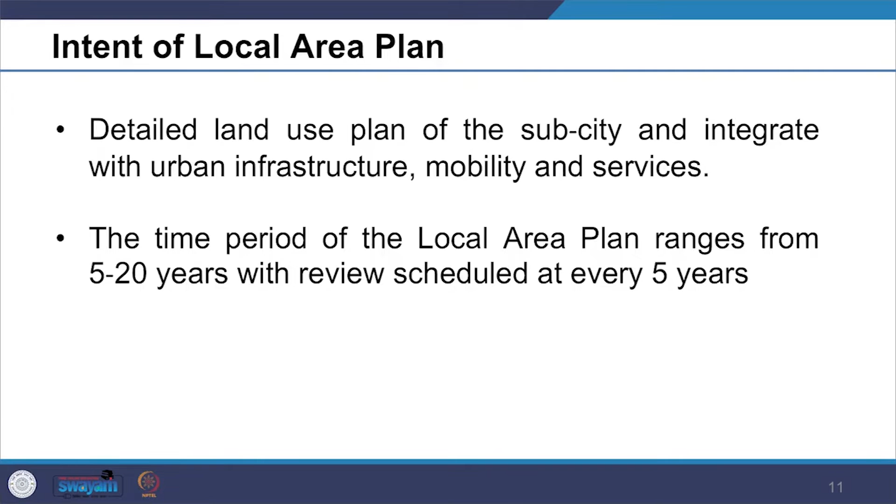Looking at the intent, in the local area plan, we provide the detailed land use plan of the sub-city and integrate it with the urban infrastructure, mobility and services. The time period for the local area plan ranges from 5 to 20 years with a review schedule at every 5 years.

Examples of local area plan include zonal plan or sub-city plan, town planning schemes, ward committee plan, coastal zone management plan, urban development plan, and urban redevelopment plan.

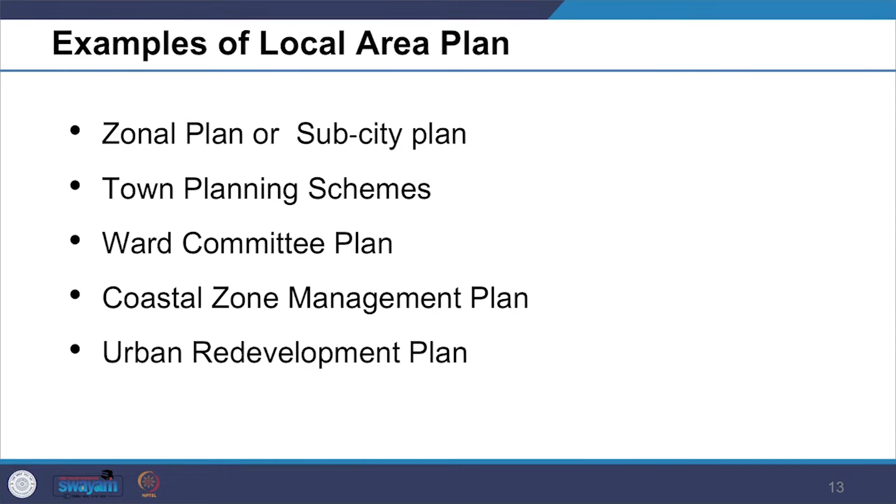Once the development plan is prepared, its proposals can be further implemented by preparing local area plan. Local area plan is significant in view of the 73rd and 74th Constitutional Amendment Act, as a local area plan, in its true sense, allows disaggregation of the planning decision and implementation process. Local area plan improves the implementation of the development plan, and most importantly, brings the planning process closer to the local people. It allows the realization of the development in our neighborhoods.

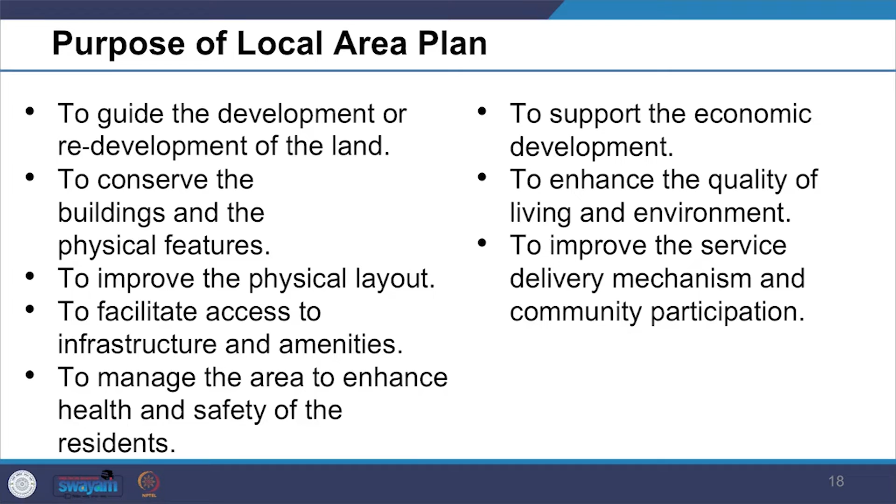Local area plans are primarily prepared to guide the development or redevelopment of the land, to conserve the buildings and the physical features, to improve the physical layout, to facilitate access to infrastructure and amenities, to manage the area to enhance health and safety of the residents, to support the economic development, and to enhance the quality of living and the environment. Local area plan is used for improving the service delivery mechanism and community participation.

While preparing the local area plan, it is also important that implementation details are specified and are aligned with government policies, such as the state land use policy, state perspective plan and/or state urbanization policy, state urban housing or affordable policy, township and integrated township policy, rainwater harvesting policy, energy policy, disaster management policy, industrial and service sector investment policy, policy for barrier-free environment for elderly and the physically disabled, e-governance and information technology policy, tourism policy and similar other policies.

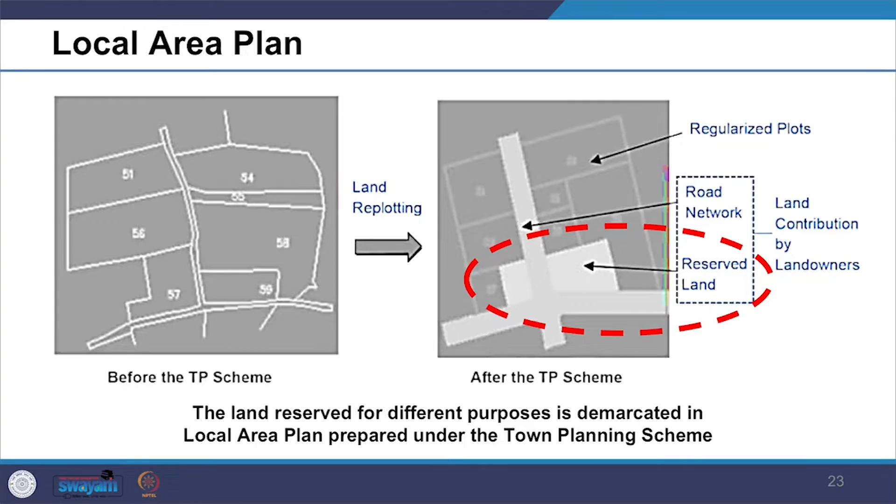In the local area plan, specific projects within the planning area should be prepared. The land reserved for different purposes such as roads, for public purpose, for construction or for reclamation should be delineated. The local area plan provides a framework for recovery of the associated cost for the proposed public projects.

The mechanism adopted could be levy of betterment charges, charges on additional development rights, or user charges.

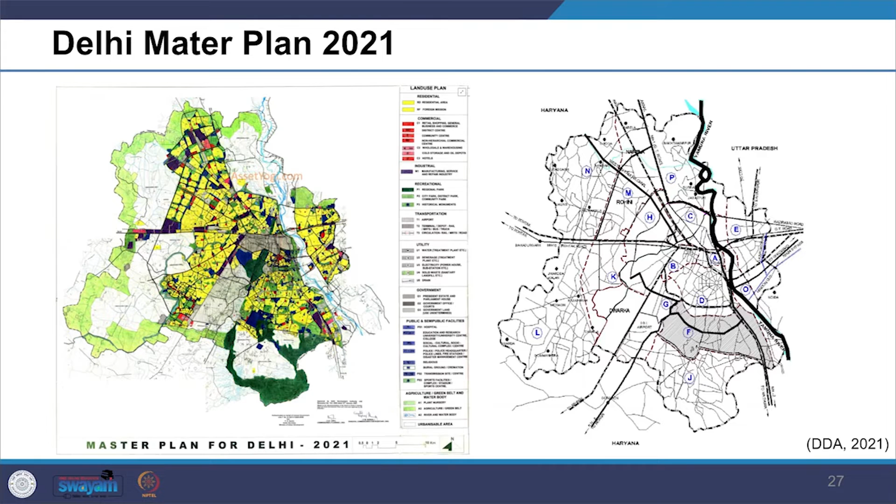Now, let us look at the example of Delhi. We are looking at the Master Plan of Delhi 2021, where planners had prepared the master plan for the entire city. In order to prepare the detailed sub-city land use plan, the Delhi planning area is further subdivided into 15 planning zones, or divisions, designated alphabets A to P zones, excluding I, as per Master Plan of 2021, as we can see in the image.

These zonal plans integrate the area with the urban infrastructure, mobility and services. These zonal plans help in implementing the development plan of Delhi through guiding the detailed development in these zones.

A zonal development plan means a plan for each zone or division, containing information regarding provision of social infrastructure, parks and open spaces, and circulation system. The zonal development plan indicates the actual as well as proposed use zones designated in the 9 land use categories stated in the master plan, according to which the area in the zone is to be finally developed.

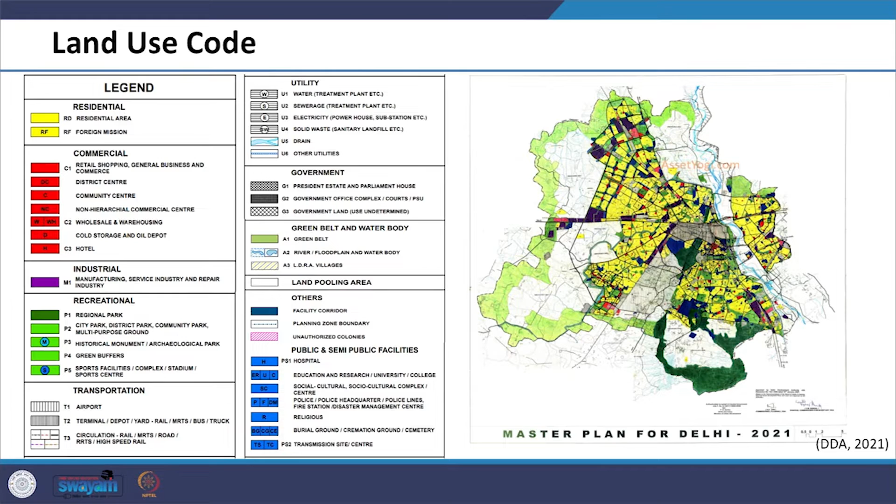We will look in detail at the zonal plan F of Delhi to understand the intent and content of a zonal plan document. Zonal plan F covers South Delhi 1 area.

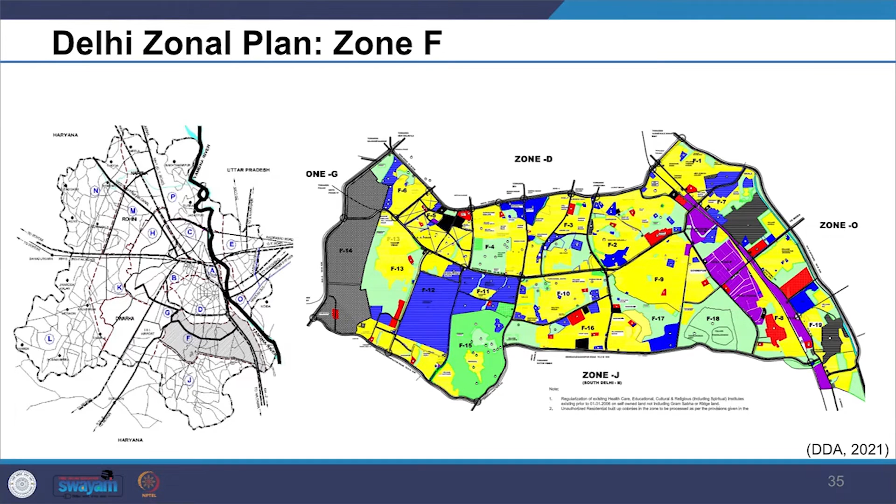The hierarchy of urban development indicated in the zonal development plan is in conformity with the Master Plan 2021. Zone F, covering an area of nearly 11,958 hectares, is situated towards the south of Ring Road from Dhaula Kuan to Maharani Bagh. In the east, it is bounded by River Yamuna and National Highway 2 bypass. In the west, it is bounded by Delhi Cantonment Area, Indira Gandhi International Airport, and National Highway 8. In the south, it is bounded by Badarpur, Mehrauli, Mahipalpur Road.

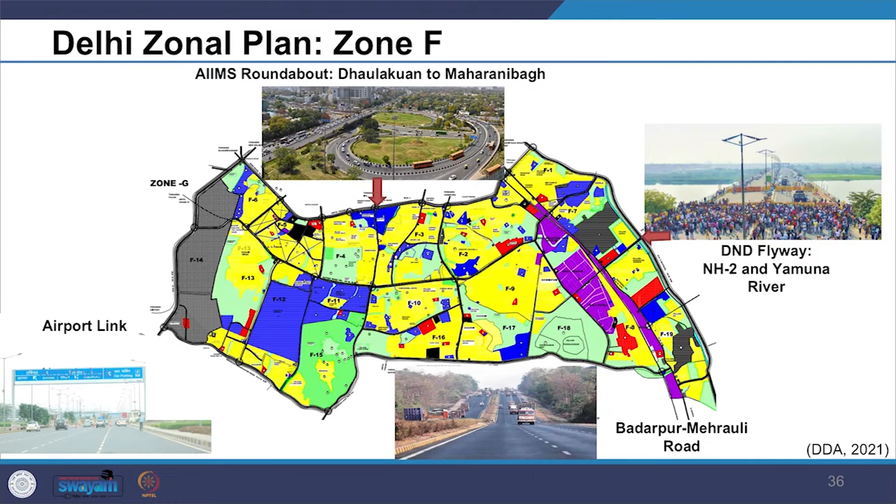As per the URDPFI guidelines, the zonal plan should contain the following. Now we are looking at the content of the zonal plan.

The zonal plan should contain an introduction section which should provide a brief about the city, indicating its regional setting, functional character, and growth trends. Further, the introduction section should also refer and connect to the development plan or the master plan of the city, for which it acts as a building block.

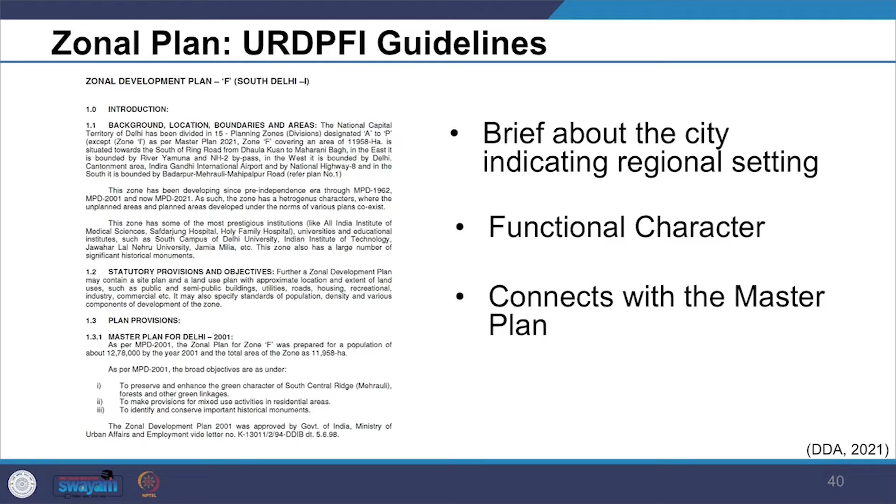We call it a building block because the local area plan plays an important role in the realization of the development plan or master plan of any city. In the plan, we also inform about the built up area, character, extent, and the delineation boundaries, so as to understand the area and plan for interventions.

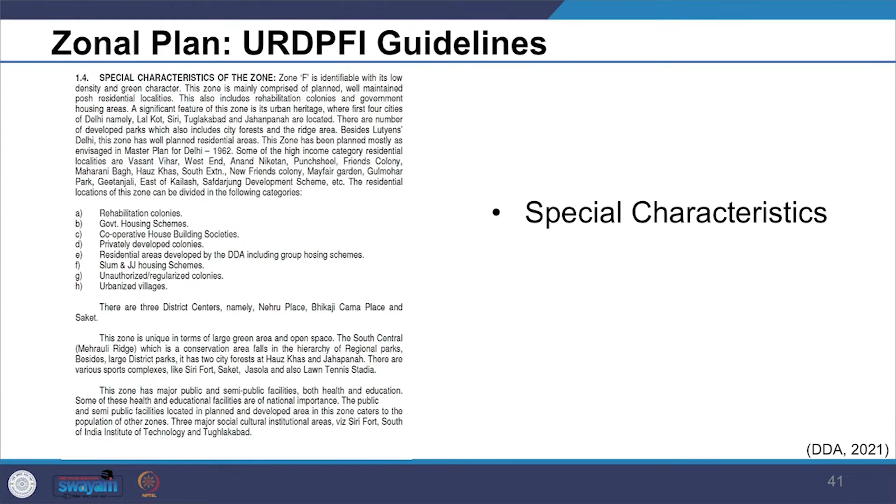In this introductory section, the interdependence of the planned zone with the other zones should be specified, so that in the plan we understand the vital role of the zone in facilitating development of the area under consideration, as well as its key role in contributing to the smooth functioning of the entire city, particularly mobility and services.

If we look into the zone, this zone has been developing since the pre-independence era through Master Plans of 1962, 2001, and 2021. As such, the zone has heterogeneous character, where unplanned areas and planned areas developed under the norms of various plans coexist.

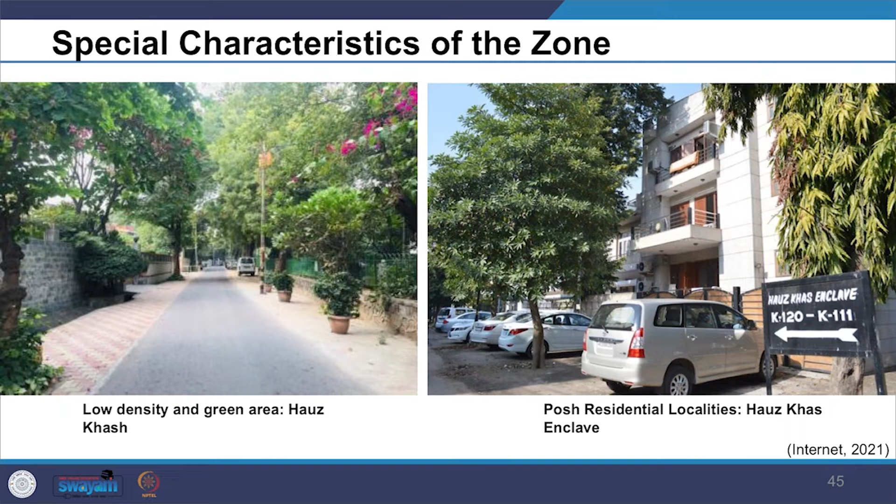Zone F is identifiable with low density and green character. This zone is mainly comprised of planned, well-maintained posh residential localities. This also includes rehabilitation colonies and government housing areas.

This zone has some of the most prestigious institutions like All India Institute of Medical Science, Safdarjung Hospital, Holy Family Hospital, universities and educational institutions such as South Campus of Delhi University, Indian Institute of Technology, Jawaharlal Nehru University, and Jamia Millia University. A significant feature of this zone is its urban heritage, where the first four cities of Delhi, namely Lal Kot,

Siri, Tughlaqabad, and Jahanpanah, are located.

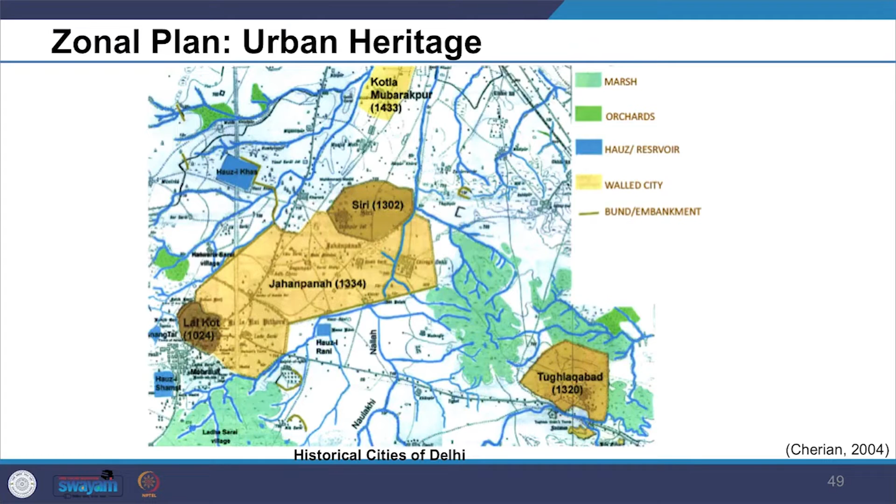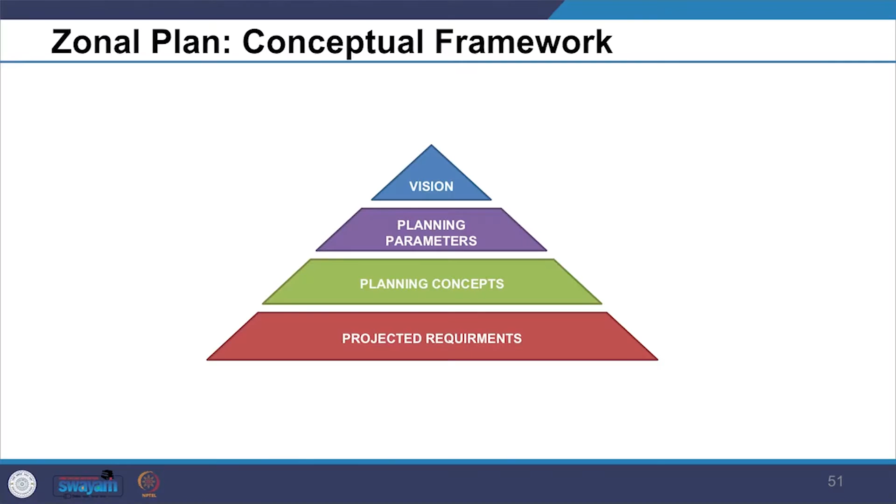The next content suggested in the guidelines includes the site background and analysis, followed by the conceptual framework covering future vision, planning parameters, planning concepts, urban design framework, projected requirements, and hierarchy targeted in the zone.

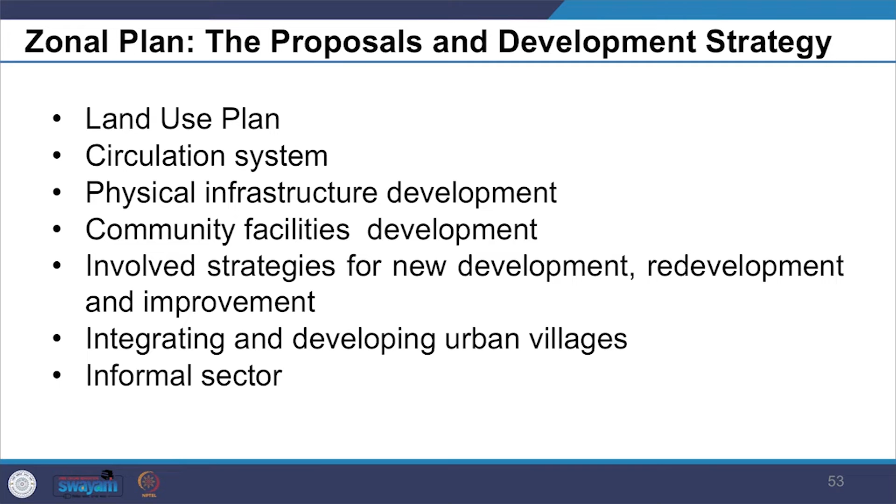Thereafter, in the zonal plan, the proposal and the development strategy should be provided in detail, including the land use plan, proposed circulation system, proposals for physical infrastructure development, and proposals for community facilities development, involving strategies for new development, redevelopment, and improvement. All these plans have to be given.

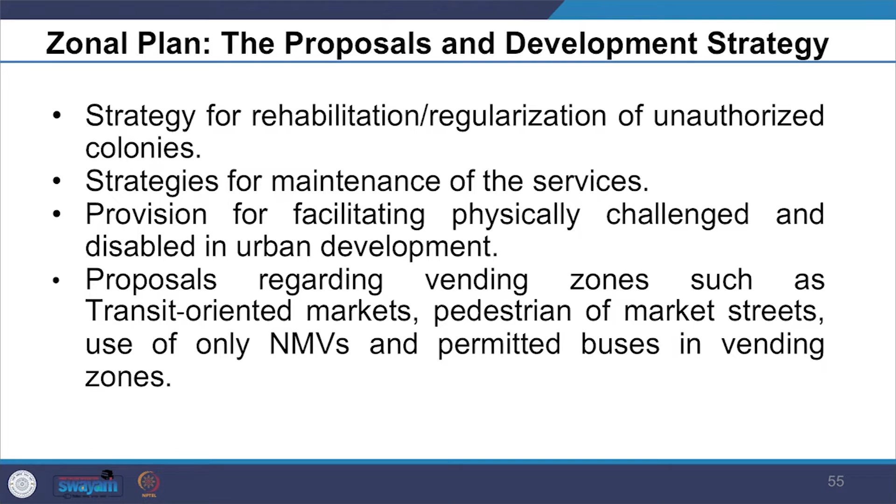Proposal for integrating and developing urban villages has to be provided, as well as proposal for informal sector development. The details should also cover the strategy for rehabilitation, regularization of unauthorized colonies, strategies for maintenance of these services, and provision for facilitating physically challenged and disabled persons in urban development.

Proposals regarding vending zones such as transit-oriented markets, pedestrianization of market streets, use of only non-motorized vehicles, and permitted buses in vending zones. Such kind of interventions can also be taken up in the zonal plan.

Further, in order to address the concerns of the environment, the guidelines suggest the following should be covered: plan for conservation and improvement of land profile, rivers, streams, watersheds, green covers and landscape should be prepared as per the requirements of the zone. Identification of heritage areas and zones, and plan for conservation, should be provided. Energy efficient and environmentally sustainable development has to be taken care of.

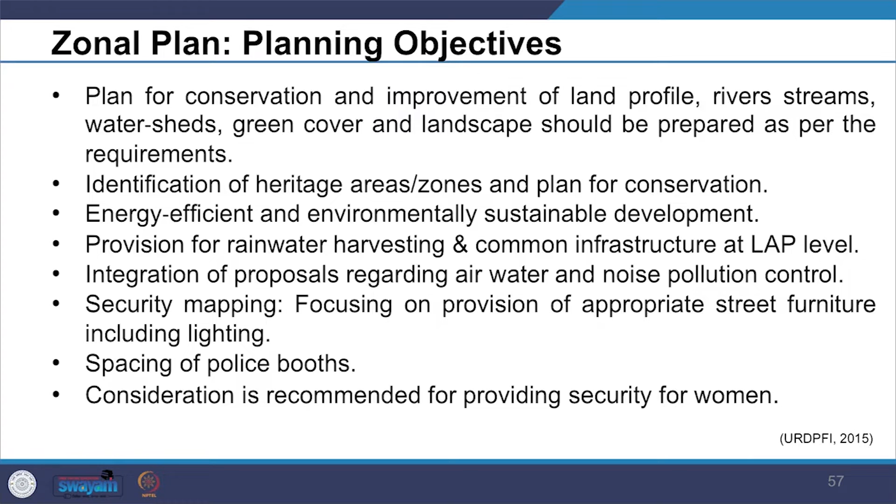Provision for water harvesting and common infrastructure at local area plan level has to be considered. Integration of proposals regarding air, water and noise pollution control has to be done. Security mapping focusing on provision of appropriate street furniture including lighting needs to be undertaken. Spacing of police booths has to be done. Consideration is recommended by the guidelines for providing security for women. All these things have to be taken care of as environmental concerns while working on the zonal plan.

Furthermore, zoning regulations have to be seen, such as defining various zones, what use restrictions would be there, uses permitted, conditionally permitted and uses which are prohibited has to be spelled out. What has been proposed for mixed use land uses has to be indicated. Strategy for non-conforming land use have to be mentioned. Strategies for hazard zones and regulations have to be clarified.

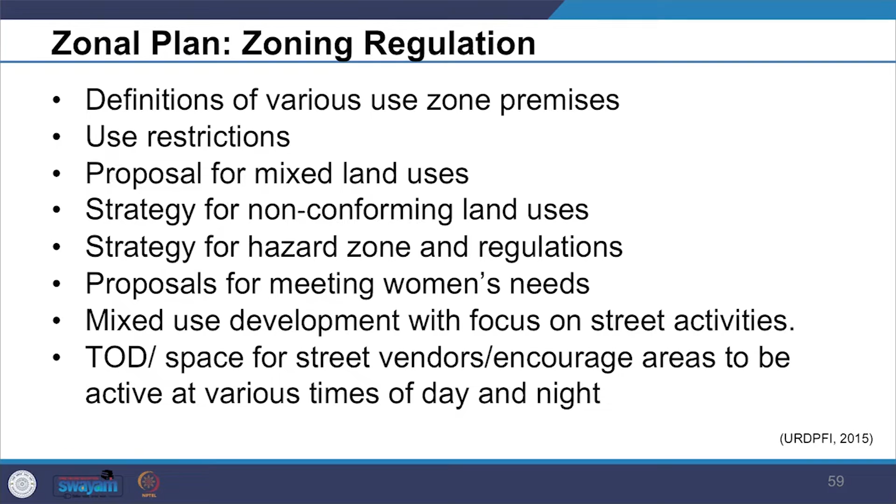Proposal for meeting women's needs, with mixed use development focusing on street activities, is also recommended specifically for women's needs. Transit oriented development and space provision for street vendors have to be encouraged in areas to be active at various times of the day and night.

We further see that the zonal plan also needs to address development regulations. Building regulations and building bylaws have to be indicated. Urban design of major hubs, if required, has to be indicated in the plan. Architectural control likewise has to be indicated. Specific development controls of heritage areas and other specific traditional areas, as defined by local authorities, if any, may be provided in the local plan.

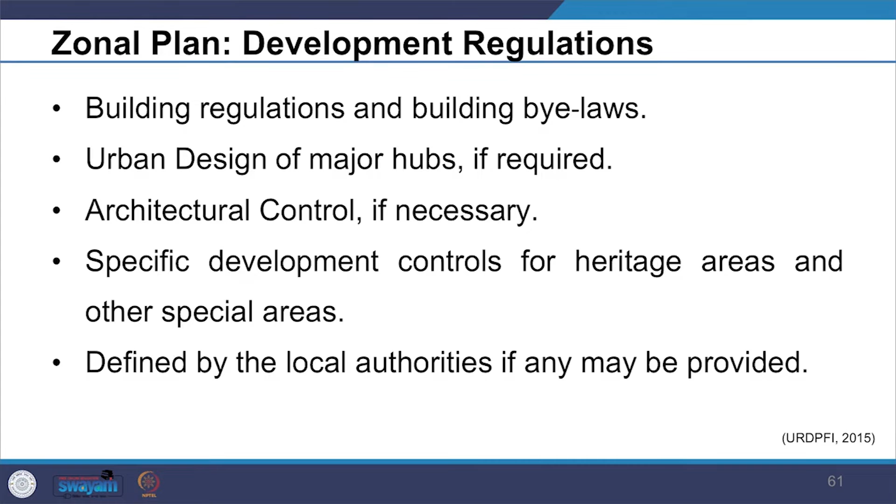Further, in the zonal plan, resource mobilization and implementation plan has to be given. While giving this, institutional setup for implementation needs to be addressed. Physical infrastructure development cost, including annual and 5-year phasing, has to be specified. Resource mobilization for implementation through public, private and other sectors has to be indicated.

Further, it needs to give an implementation framework, where one gives how the plan will be phased, what all projects and policies will be prioritized for development, and how the entire development would be managed.

Further, the local area plan provides all these maps, a suggestive list that needs to provide detailed scale maps of the prevailing situations, detailed scale maps of the existing land use, detailed scale maps of proposed land use, and scaled maps of proposed locations of infrastructure and social services, which is to be addressed in the zonal plan.

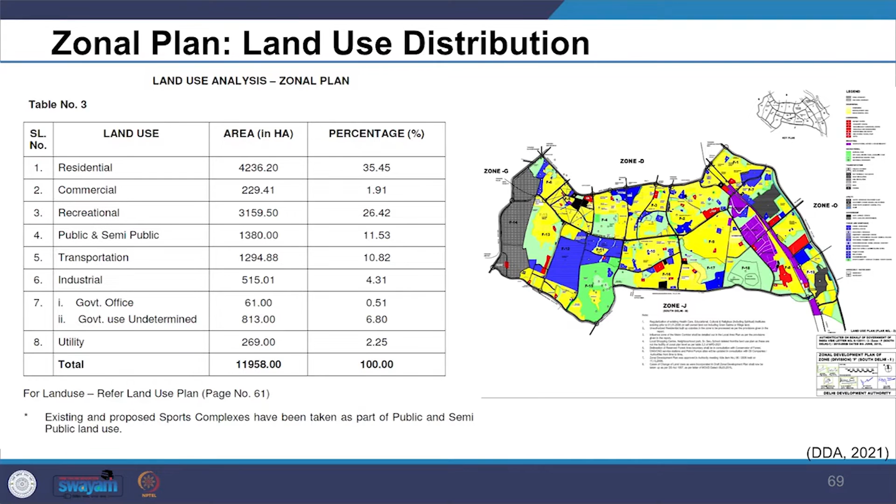Looking at zone plan F, in the background of the zonal plan, land use distribution and analysis is included, so that we know how land is put into use, its proportion, and the level of quality of life for people living in the zone. Here we see how the land is distributed, and we look at the plan prepared for that particular zone, zone F. This land use plan of zone F is made in 1:20,000 scale.

Further, while providing the population and density projection, we see the plan provides information about the existing population, the holding capacity, and the projected population. Master Plan of Delhi 2021 has stipulated the population holding capacity of this zone to be about 19,75,000, and the total area of the zone to be 11,958 hectares.

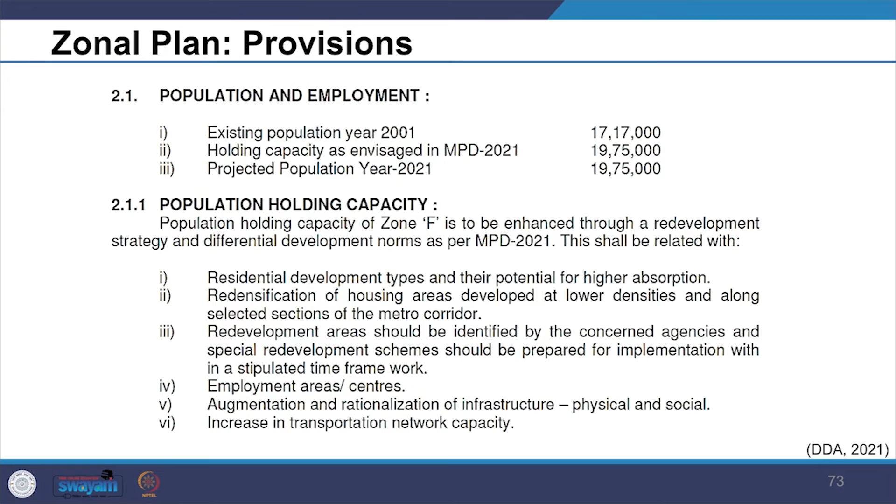As per Master Plan 2021, a number of planning measures such as local area planning, redevelopment of villages, unauthorized colonies and built-up areas, restructuring and upgradation of residential areas in the influence zone of the MRTS and major transport corridors, and a network of recreational and sports facilities to be suitably incorporated while preparing the detailed scheme, has been instructed.

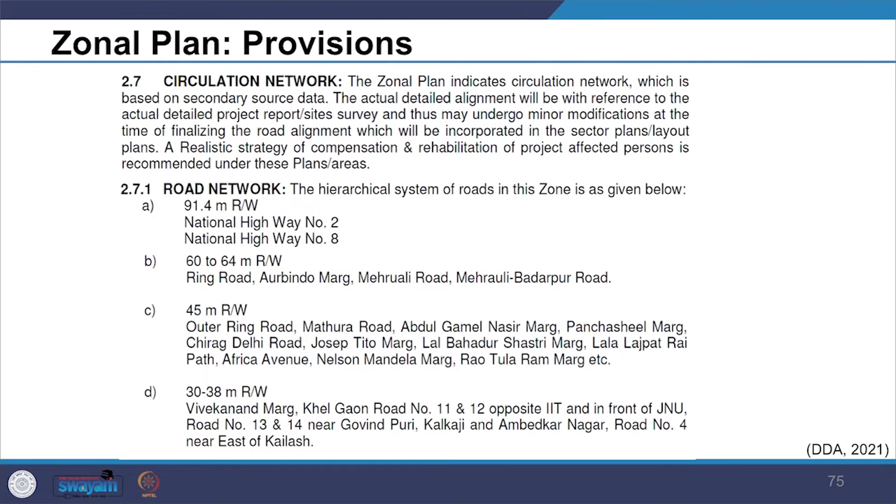In the zonal plan, information on transportation such as circulation network, traffic flow, people and goods, and terminal facilities are provided, which are important to address the needs of the area as well as the entire city. So the zonal plan provides all this information. In this snapshot you can see it talks about the circulation network, what all circulation networks and road networks are there. It gives all the details and identifies all the road stretches.

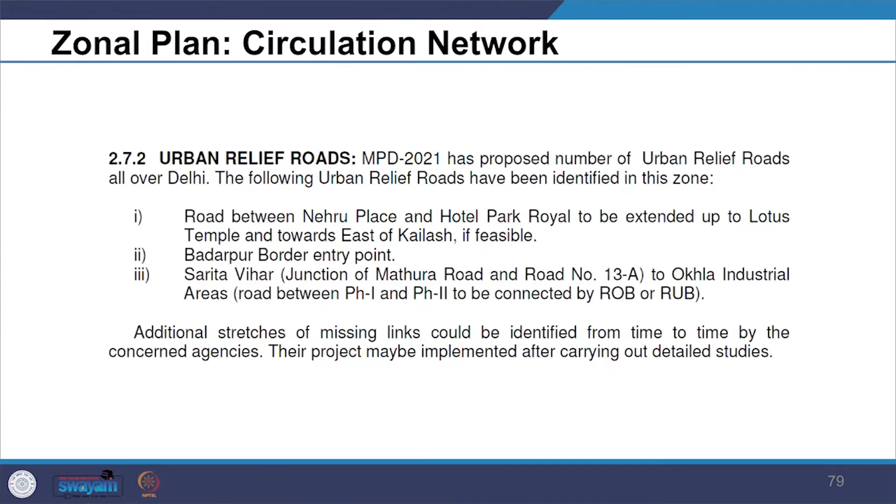It also identifies the urban relief roads, and indicates and lists all the mass transit systems in this area.

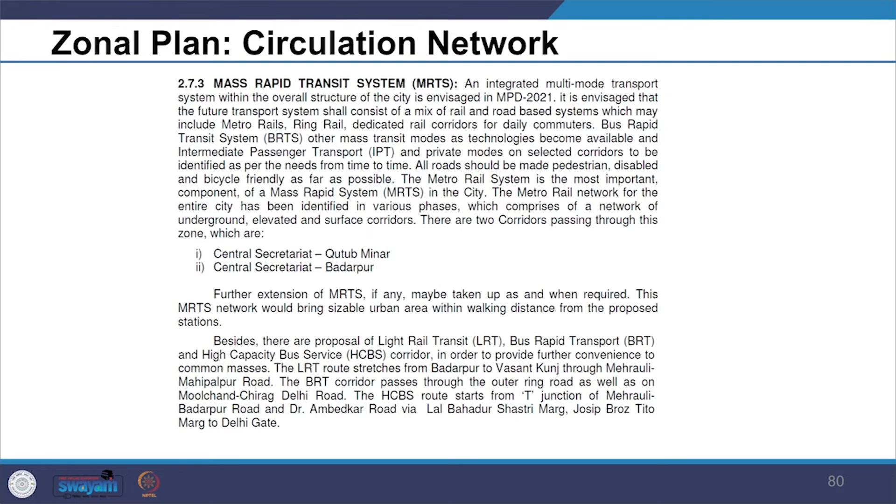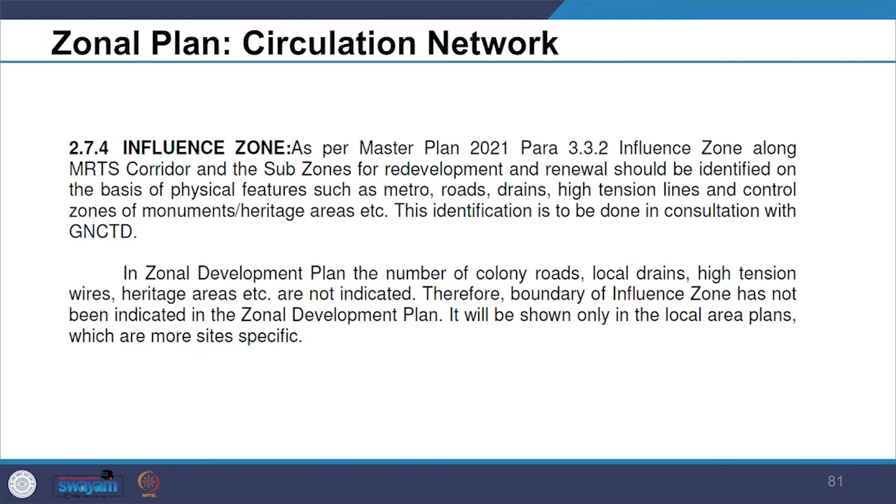We also see an indication of the influence zone and how the details of each influence zone have to be worked out. In the zonal development plan, the number of colony roads, local drains, high tension wires, heritage areas, etc. are not indicated. Therefore, in this particular plan, they have indicated the limitation of why the details of the influence zone could not be made.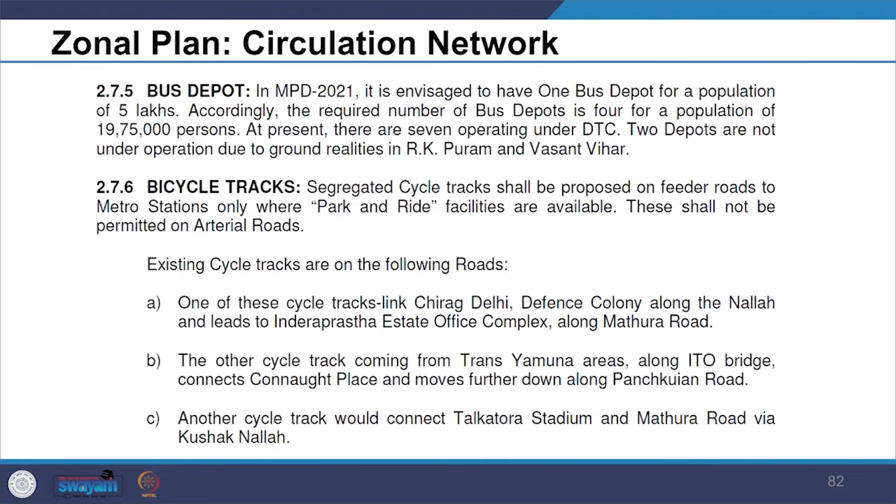Likewise, it gives information on the bus depot, bicycle tracks proposed, and also the railway stations. Further, we see within this circulation...

they also provide information on parking and the range of parkings which we see. You can see here they provide information on park and ride, public parking, parking facilities in DTC depot, underground parking, parking in residential areas, multi-level parking, and idle truck parking. So you can see the range of parking which has been identified, demarcated, and provided in the zonal plan.

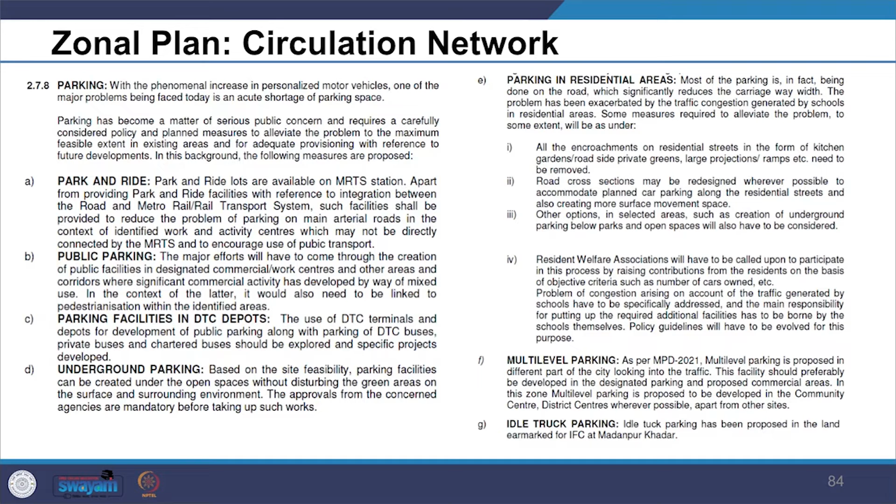The zonal plan further provides information on the physical and social infrastructure along with assessment of current gap and future need of the population.

Further, in order to address the gap, rebuilding, upgradation and modernization of the existing old hospitals is proposed by enhancement of FAR for various levels of health infrastructure. So in order to meet the projected target, enhancement of FAR has been recommended.

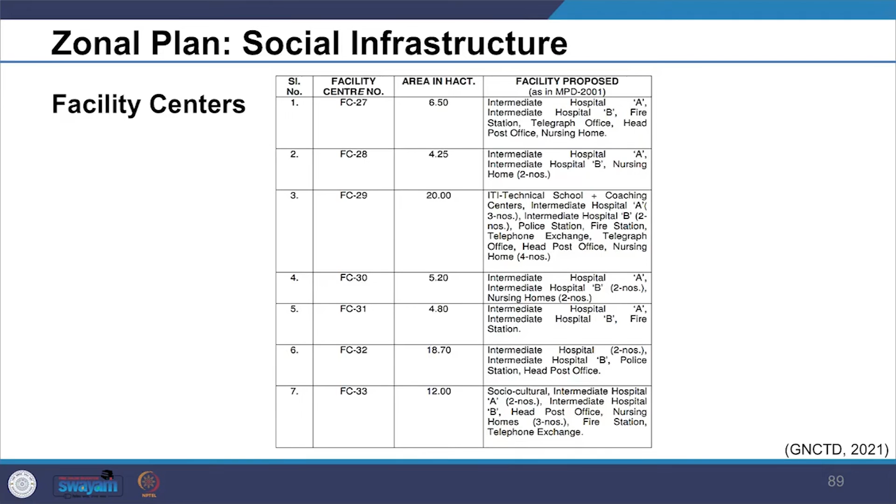The zonal plan provides detail on the environment such as green cover including parks, open spaces, forest, orchards and green. Here we see the snapshot of the zonal plan document.

Environmental areas of significance have been identified, and all the recreational areas have been identified. We see that this zone is unique in terms of large green area and open space. The south central Mehrauli Ridge, which is a conservation area, falls in the hierarchy of regional parks. Besides large district parks, it has two city forests, Hauz Khas and Jahanpanah. There are various sports complexes like Siri Fort, Saket, Jasola, and also lawn tennis stadia.

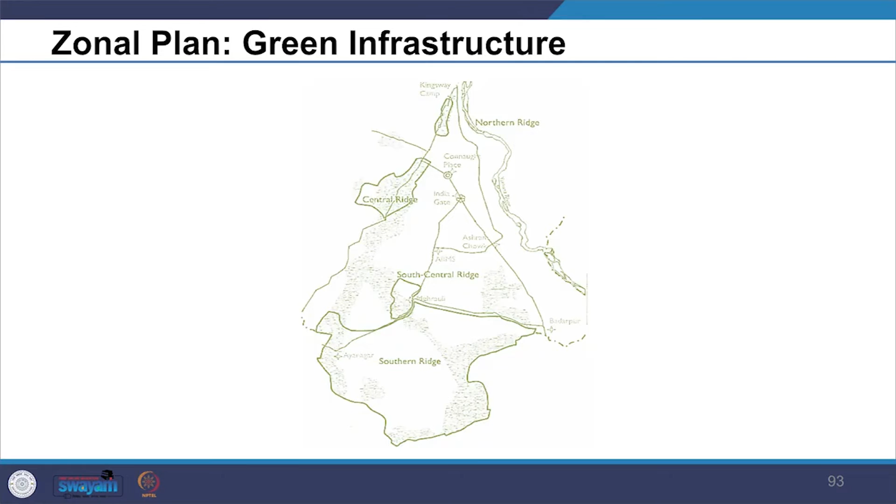We look at all these parks at the south central ridge area which are located in this zone, and what kind of planning interventions are needed to protect them and enhance their quality. We can also see the district park of Hauz Khas, the district park of Dhaula Kuan, and Satpula Lake here.

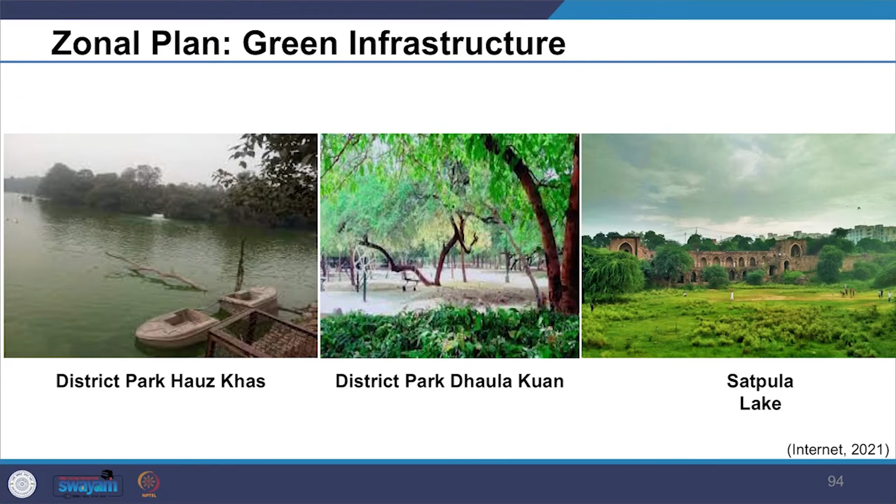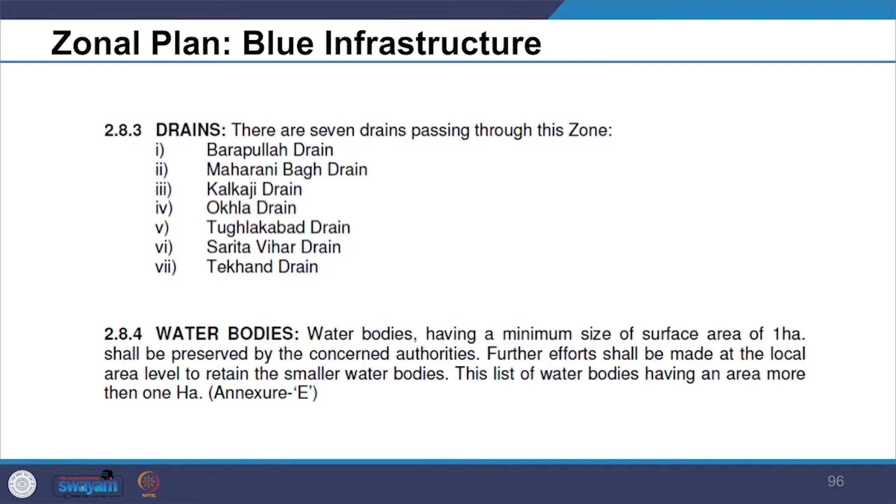In the plan, we see the slope analysis and drainage information as well, which are necessary for decision making. The snapshot of the zonal plan here shows how they have indicated and listed all the drainage that is there and the water bodies located in the zone. So we can see here Barapullah drain, just to understand the location, and Maharani Bagh drain. So we can see the situation in the zone.

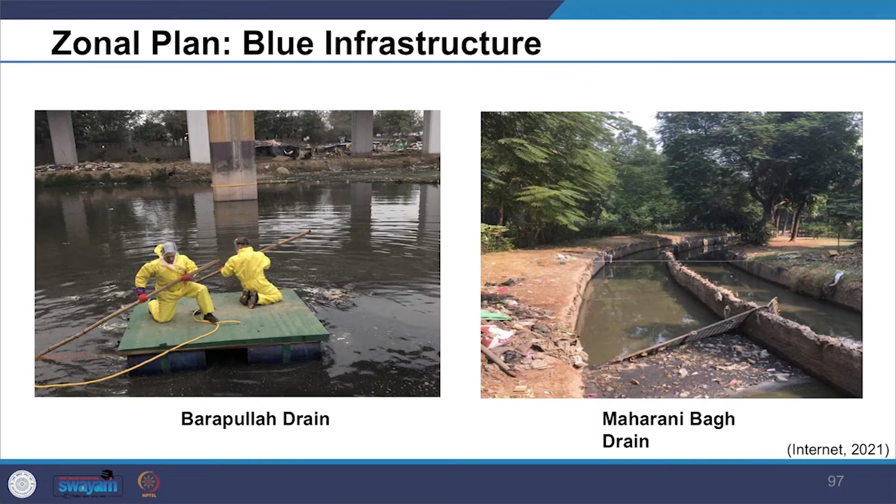Further, in the zonal plan, we see that information on housing stock and typologies such as low cost housing and affordable housing are provided in detail for addressing the housing concern at the zonal and city level.

The types of housing subsystems which we see are plotted residential development, rehabilitation colonies, villages, unauthorized colonies, mixed land use, resettlement colonies, and housing for the poor.

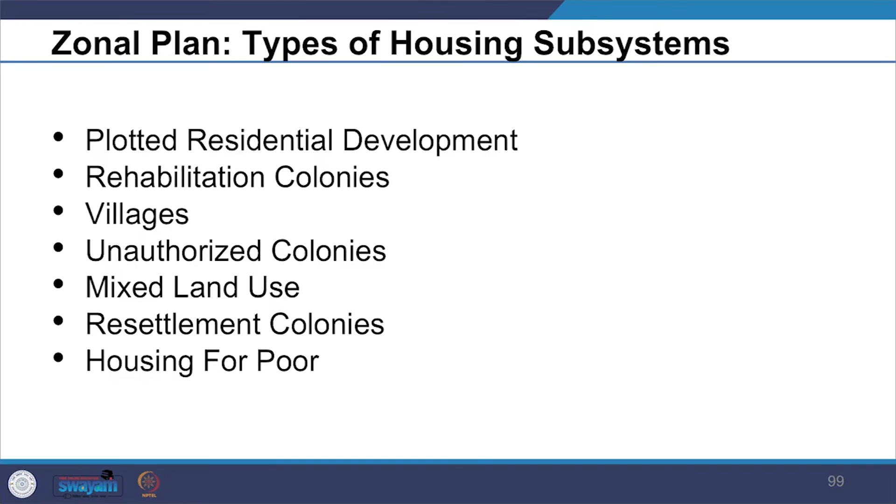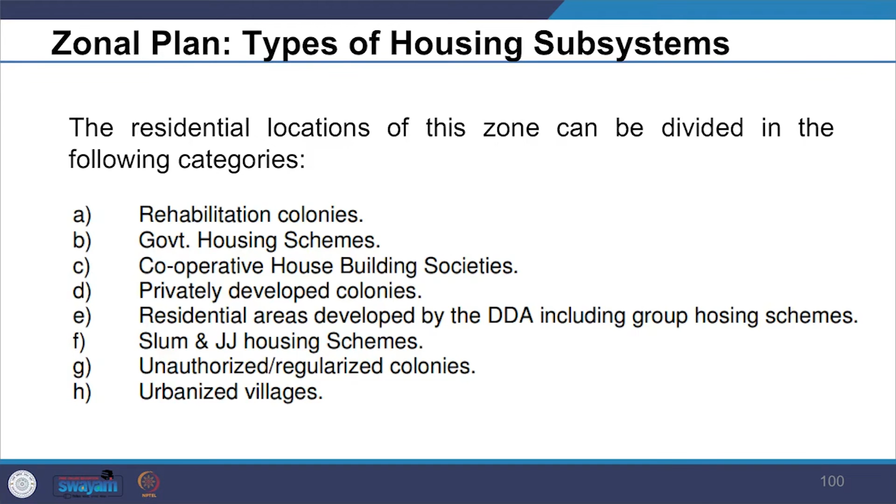The residential locations identified in this zone have been subdivided into following categories in the zonal plan, which include rehabilitation colonies, government housing schemes, cooperative house building societies, privately developed colonies, residential areas developed by DDA including group housing schemes, slum and jhuggi-jhopdi housing schemes, unauthorized regularized colonies, and urbanized villages. So we see all these criteria have been identified and noted down in the zonal plan.

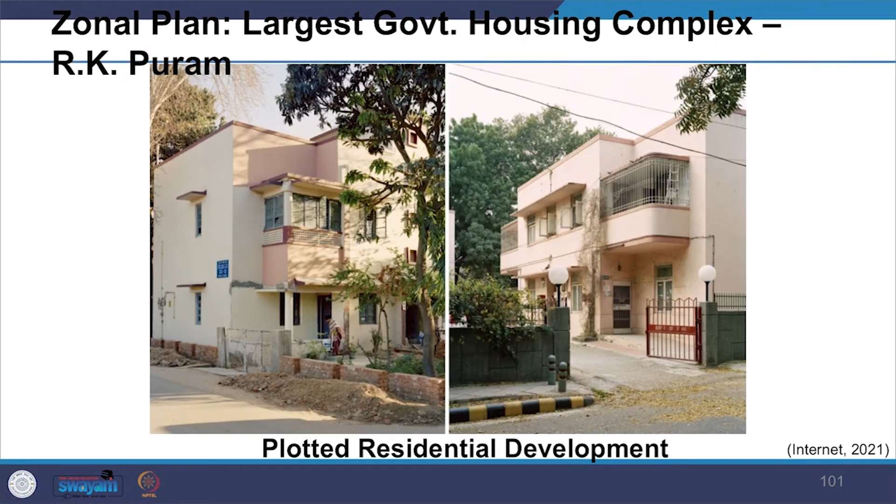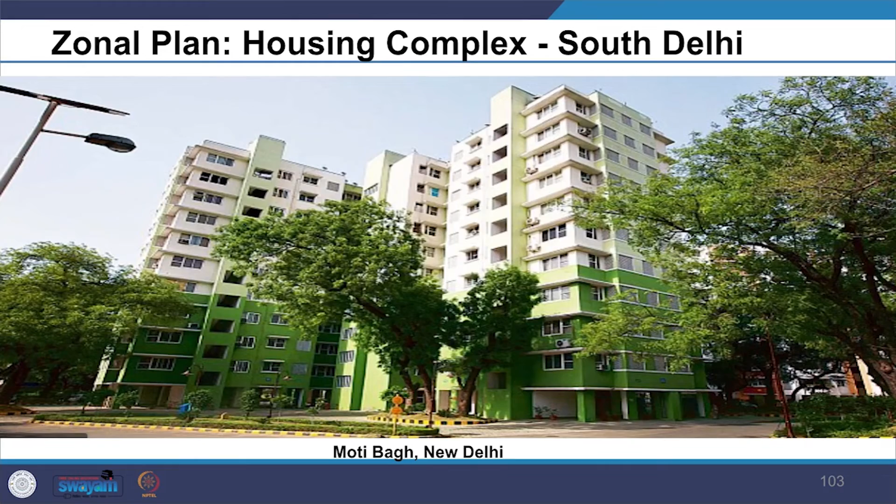We see the glimpses of this plotted residential development. This is one of the largest government housing complexes at R.K. Puram. We see another largest government housing complex at South Delhi. Another project we see at Moti Bagh, New Delhi, so you may get an idea about the region we are talking about. And this is the judges', top officials' housing complex.

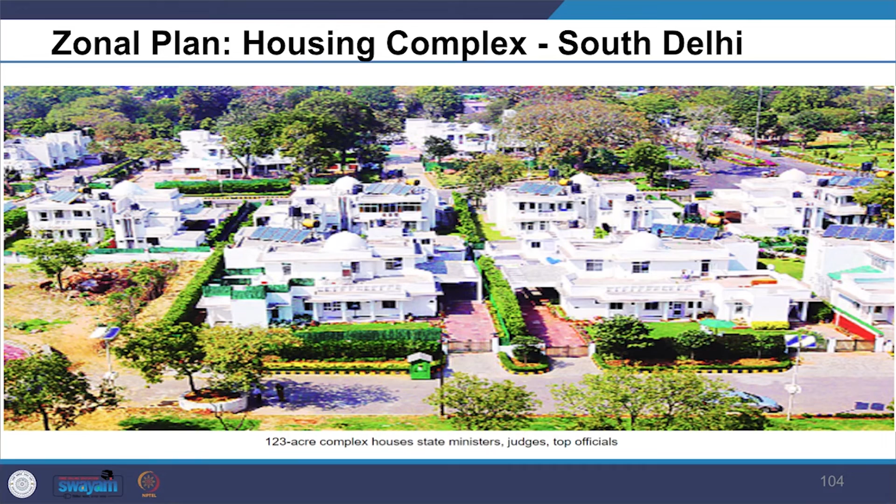Further, we see that there are several large rehabilitation colonies developed by the Ministry of Rehabilitation to provide accommodation for the displaced persons after the independence of the country.

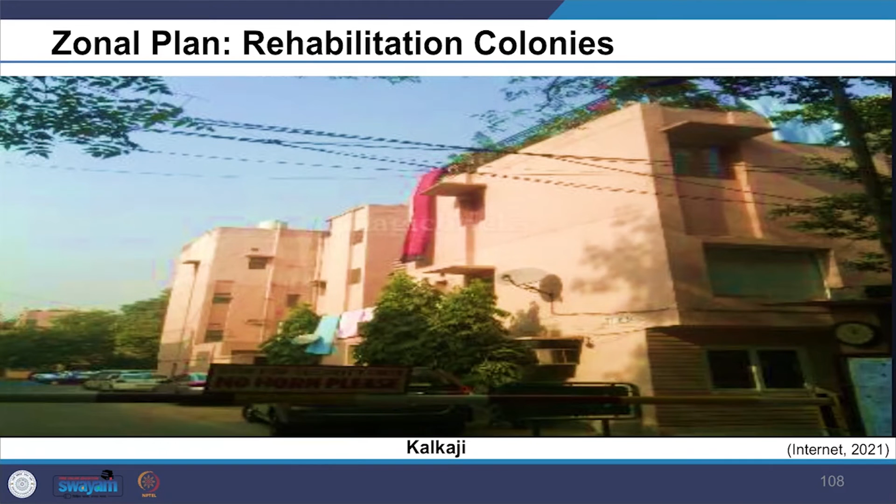These have become very congested, as you have also seen in the picture, mainly due to non-residential activities in the residential premises. Therefore, in the zonal plan, it has been highlighted that for certain pockets where there is heavy congestion, an urban renewal scheme be prepared and required infrastructure be provided by the local body.

Further, we see that the zonal plan also identifies unauthorized colonies. So there has been an initiative to regularize unauthorized colonies by the Government of National Capital Territory of Delhi. So within that, like we talked about how we fit in with the other interventions and the policy, regularization of unauthorized colonies is being taken up, and in the zonal plan, the tentative list of unauthorized colonies falling in the zone has been provided.

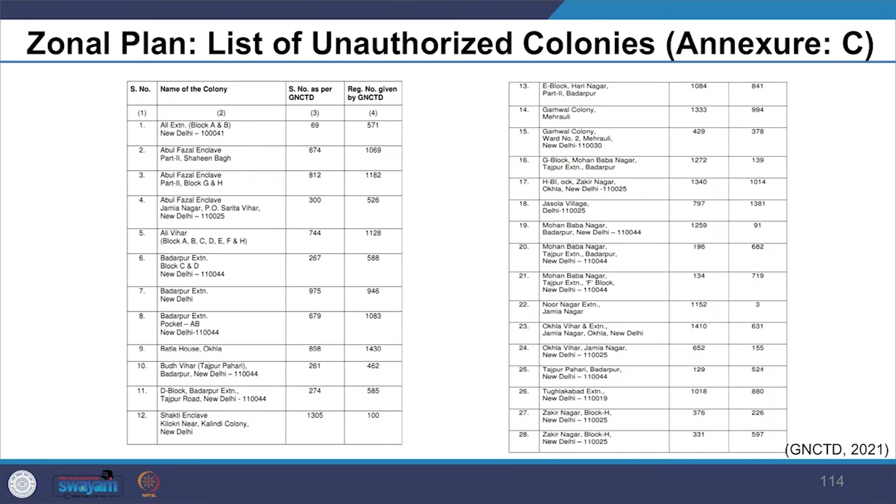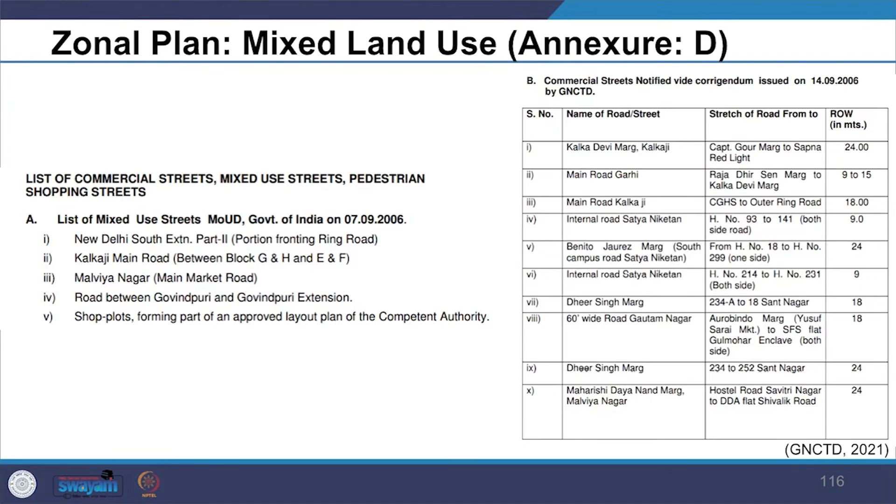Next, we can see the category of resettlement colonies. There are a number of resettlement colonies in this zone. Most of the resettlement colonies have been provided with essential services, but the immediate need is of individual services, that is water, sewerage and electricity. The zonal plan states that construction of houses should be aligned with approved standards and building plans to ensure a healthy and better environment.

In the zonal plan, provision has been made for cooperative societies, private developers, and government agencies to come forward for redevelopment based on the incentives applicable for the squatter rehabilitation scheme.

Likewise, we also see another typology addressing the housing for the poor. In the zonal plan, all the resettlement plots are identified.

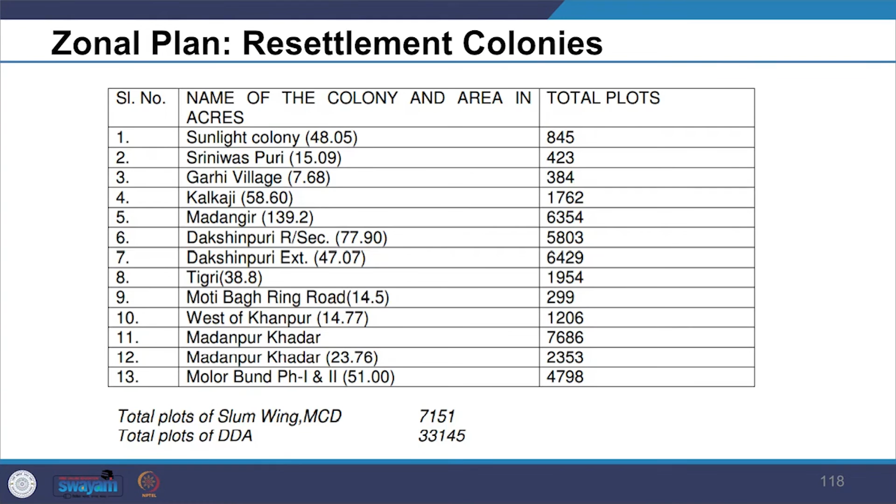As per the records, the zone has more than 40,000 resettlement plots and 31,000 EWS Janta dwelling units. Likewise, for slum rehabilitation, in the zonal plan all the locations have been identified. We see 96 slum clusters in the zone.

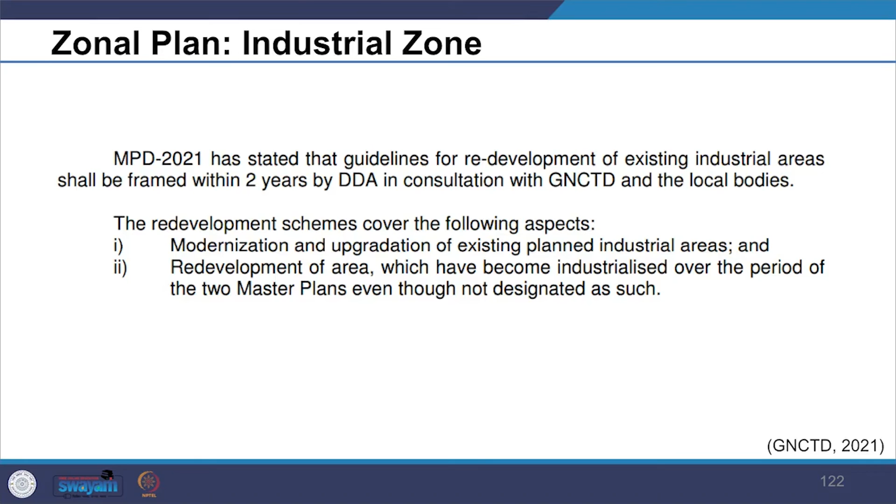Further, we see the industrial segment is also addressed. In the zonal plan, current industrial guidelines are reviewed, which talk about guidelines for redevelopment of existing industries, which have to be framed within 2 years by DDA in consultation with GNCTD and the local bodies. The overall strategies for the redevelopment scheme cover modernization and upgradation of existing planned industrial areas, and redevelopment of areas which have become industrialized over the period of 2 master plans, even though not designated as such.

In this particular zone, we have Okhla Industrial Area phase 1, 2 and 3. We also see Mohan Cooperative Industrial Area, and SI Complex, Okhla near Modi Flour Mill. So we see these 3 industrial areas in this zone.

These industrialized areas were developed in the 70s and over the years have deteriorated considerably in terms of physical infrastructure, and in some cases deficiencies on this score have persisted in an overall sense. Besides, there have been changes in the nature of activities in some of the areas, and there has also been demand for using part of the plots for activities which could be classified as commercial.

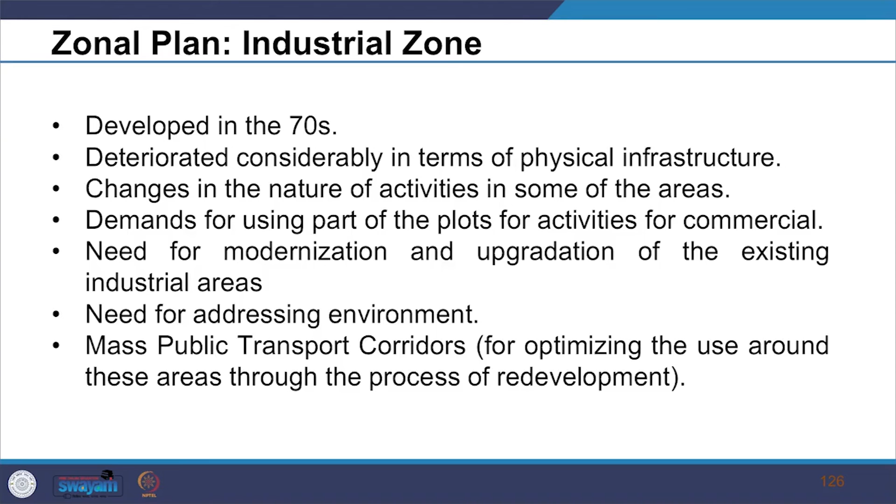Therefore, in the zonal plan, the need for modernization and upgradation of the existing industrial areas with due regard to environmental consideration has been emphasized. Also, as most of the industrial areas are located along the mass public transport corridors, the need for optimizing the use around these areas through the process of redevelopment has been proposed.

We further see urban design guidelines which have been addressed in this zonal plan. We see provision for district centers has been made in this plan, which will be accessible through the major transport modes and surrounding residential areas through pedestrian approaches, and these district centers have to be integrated with the public spaces.

We also see other provisions given for other areas for urban design interventions. So all the historical monumental places have to be taken under urban design aspect. And then also areas along the entry routes and other important routes in Delhi, like Badarpur border, they all need to be addressed through urban design intervention.

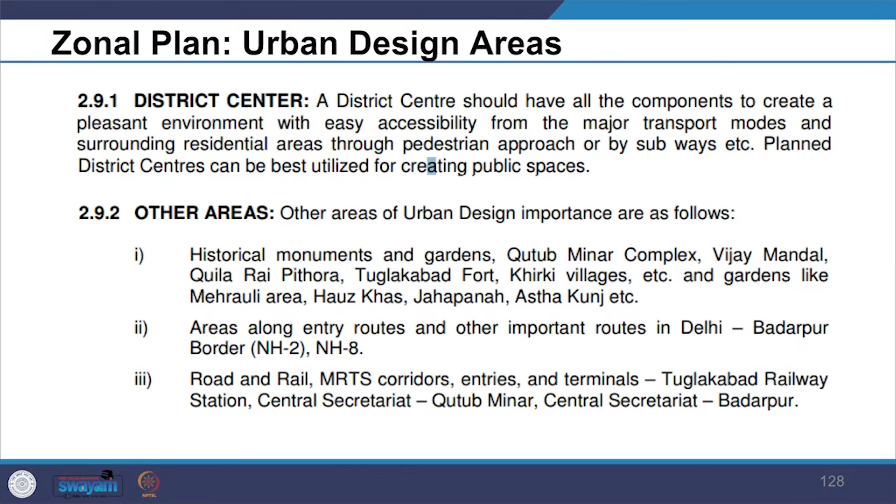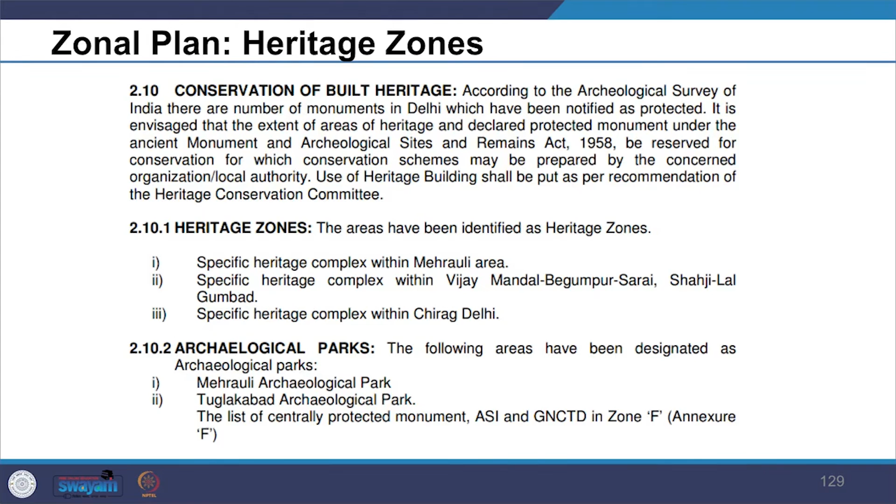Likewise, all the MRTS corridors, entries and terminals like Tughlakabad railway station, Central Secretariat, Qutub Minar, and Badarpur have to be considered under the urban design intervention. Similarly, we see there are proposals for conservation of built heritage, heritage zones have been identified, and archaeological parks have been identified in the zone for further interventions.

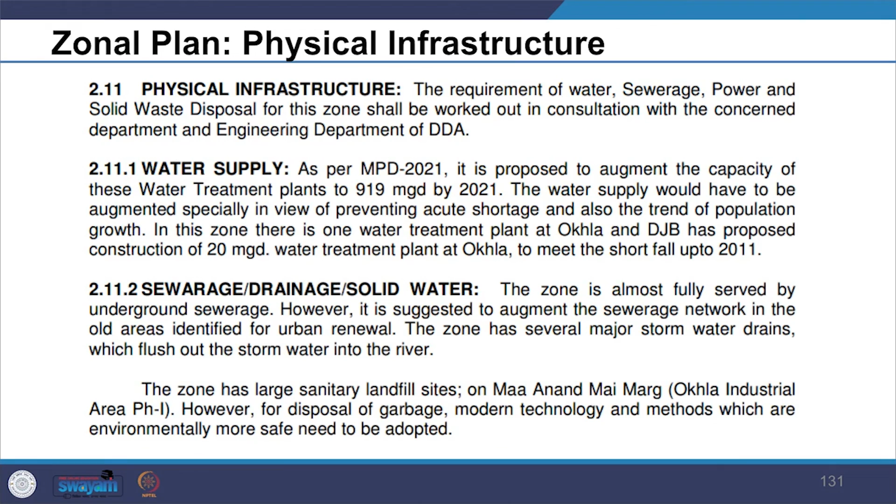Similarly, we see the zonal plan identifies the physical infrastructure which majorly concerns water supply, sewerage, drainage and solid waste. So all those interventions and how they have to be taken care of are addressed in the plan. Also, in the physical infrastructure intervention, power and other such things have been identified, and then the land use plan has been indicated.

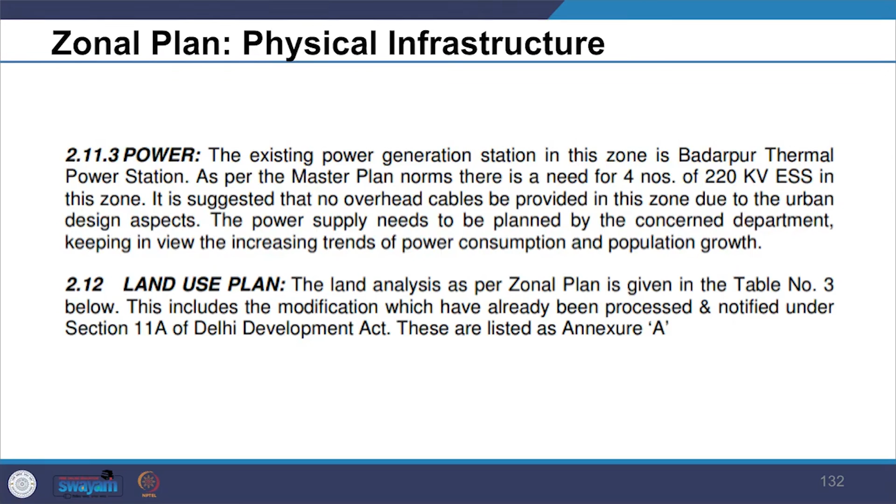So by reviewing the zonal plan of Zone F of Delhi, we have seen how Zone F was detailed out. All the aspects were clearly stated in the plan, and they were interconnected through the circulations and through the other infrastructure with the other parts of the city. We have seen what all details the document contains and how they are interconnected.

So we have looked into the intent of the local area plan, why it is made. Then we have also seen different kinds of local area plans, and we have reviewed the zonal plan, one of the zonal plans of Delhi, to understand the intent and content of local area plans.